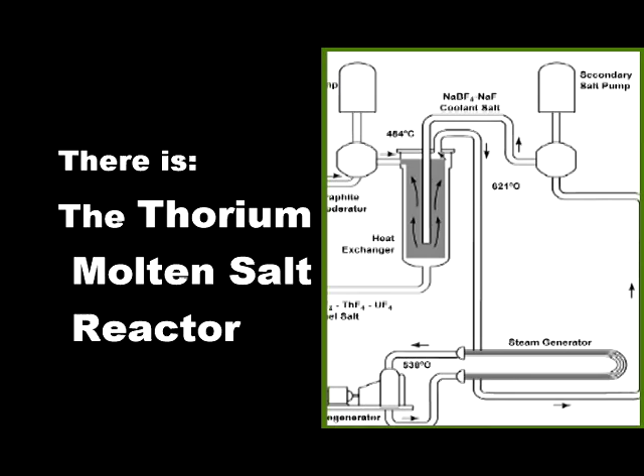You can't tell me for one second that if we put our minds to it as a species, we can't get that thing built, using existing materials. It's fine, because in the meantime we've got computers. We can model down to the atomic level what this stuff is going to do. We have huge numbers of world-class scientists at the 22 national laboratories here in the United States. We can partner up with the Czech Republic. Jan Uhlíř is doing some fabulous work in Prague right now. David LeBlanc is doing outstanding work in Canada right now. Let's do it. We can do it in 5 years, 6 years, without question. With enough money and enough will, we can do it because we definitely have the brain power. Definitely.

A molten salt reactor, particularly either a uranium or a thorium one. I prefer the thorium one, but it needs a kickstart. It needs a kickstart. And there's this thing called K-effective, whatever. You need enough neutrons around to keep the thing going, the so-called chain reaction.

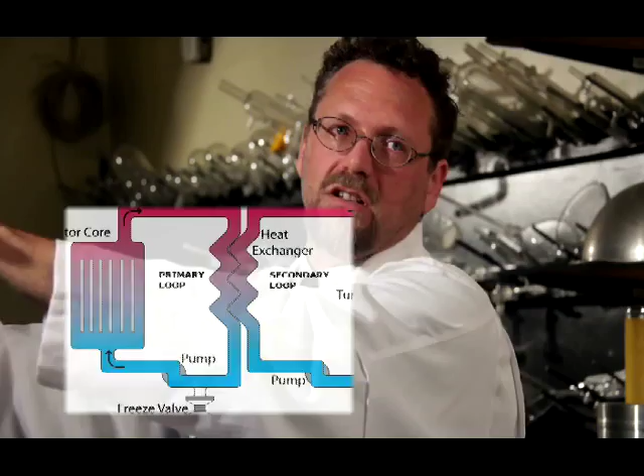And to heat up, you can do it a number of different ways. You can heat up another fluid or two fluids, and get that heat transferred into a turbine because you can make steam with that. The steam will make the turbine move, and you generate electricity in that fashion. Fabulous, everybody's happy. So that's why a molten salt reactor is so efficient.

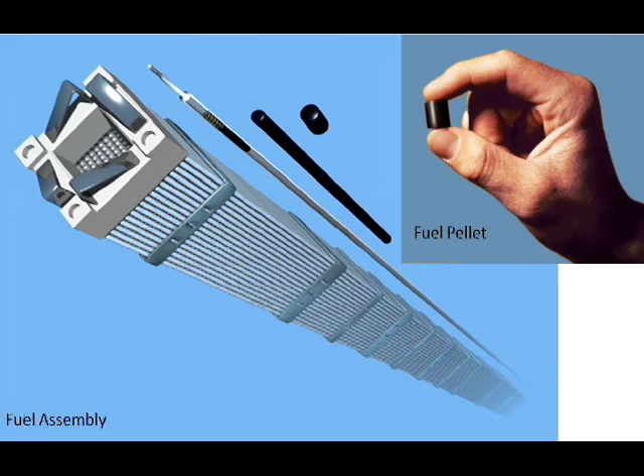Nuclear waste, as historically or classically thought of, basically comes in two forms, okay? Spent nuclear fuel, okay, it's in the form of these pellets, and these are the fuel rods, and those are little pellets. They are around 4 to 5% enriched of uranium-235. The waste stems from the fact that those are incompletely used. They are not used to completion. The way we do it right now is, again, poor design. I mean, those are not used to completion. As a result, there are two forms of nuclear waste: there are those unspent, incompletely utilized fuel rods, and those have two things: fission products, okay, and I'll go into what those are in a second, and so-called transuranics.

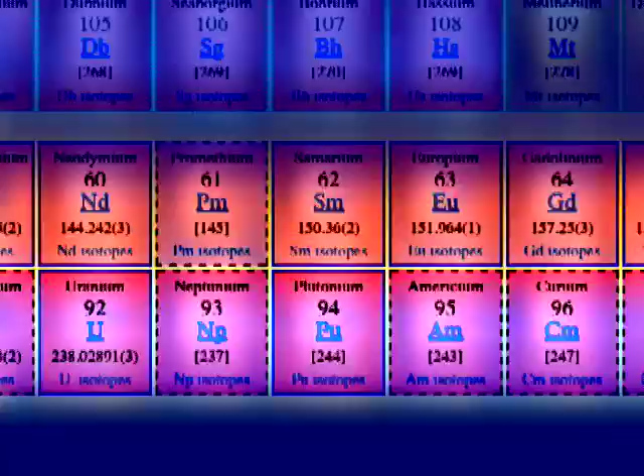When the nuclear reaction occurs, you get elements and isotopes that are bigger than uranium. You keep adding and going up and up and up. That's why uranium is not the last element in the periodic table. It's not the last element, okay? There are many elements that actually occur after uranium, and the reason is that they keep adding on as a result of these nuclear events.

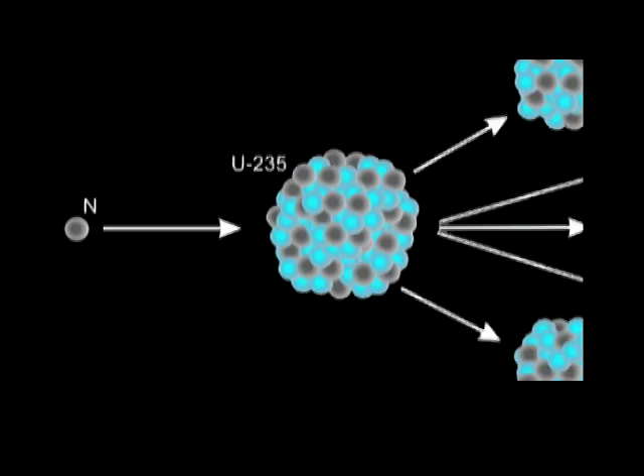That's one type of nuclear waste. That's the weird one, and that's kind of the scary one, because you can do really bad stuff with that. The other type is as a result of the fission event. When a uranium nucleus gets whacked by a neutron, it splits in very predictable ways. And those so-called daughter products are smaller, because now I've split one big nucleus into smaller ones.

Those are the fission products. Those aren't nearly as bad because you can't make a bomb with them. That's not weapons stuff. Nevertheless, they do emit subatomic particles, and they can be around for a very long time. So I'm not calling it safe, but that's kind of the safer of the two, because you can still do really bad stuff with the transuranics.

As a result of the incomplete nuclear fission, unfortunately, we can get stuff that is much heavier than uranium. Everybody knows about the most famous one, plutonium. It took on 4 more nucleons, 2 protons, 2 neutrons. So plutonium is 2 further up from uranium, and it's gone to 239, which is the very bad one. Plutonium-238 is actually a very useful one, but plutonium-239 is very bad.

And so now that's 4 up from 235, so that had to occur in some fashion. And it turns out that there are other elements beyond that. But you can still do very bad stuff with plutonium, obviously. Neptunium, it was proved that you can make a nuclear device with neptunium, so you can do bad stuff with that.

And then the other type is, as I had said before, the fission products. They give off a lot of heat in the form of subatomic particles, usually beta particles. But you can't make a nuclear weapon with those. They are long-lived. So those are the 2 types of nuclear waste.

So that's why a molten salt reactor actually works so much more efficiently. You've got fabulous surface area because it's a liquid, so everything's touching everything else. It's one big soup, and you can get very efficient expenditure of that. And that, combined with the fact that it is a liquid, so it's moving.

They basically fall into two camps, with one little provision. Camp one is a true molten salt reactor, where, like I said before, the fluid is both the fuel and the coolant. Jiang Mianheng and his project in China right now is with Westinghouse, and that is where the fuel is still solid and the molten salt is being used merely as the working fluid, merely as the heat transfer medium. Those are the two groups right now.

Per Peterson is also using the same design at Berkeley in concert with MIT and University of Wisconsin-Madison. That is where you use the molten salt as merely the working fluid or the coolant, and you still nevertheless have a solid fuel. David LeBlanc, basically the leading physicist in Canada, talks about a true molten salt reactor, using a fissile fuel as the molten salt where the fuel is its own coolant. He prefers to use LEU, low enriched uranium-235.

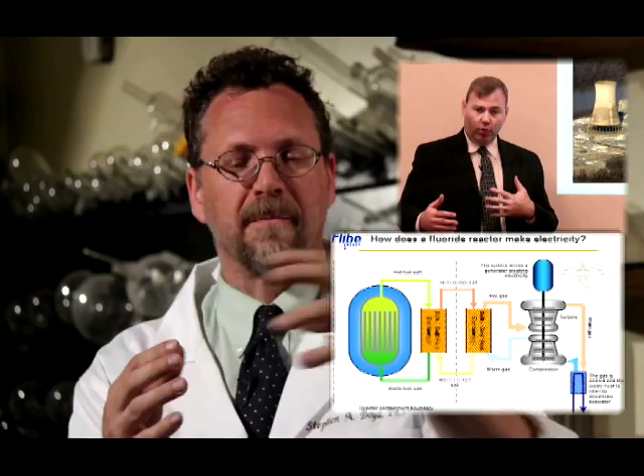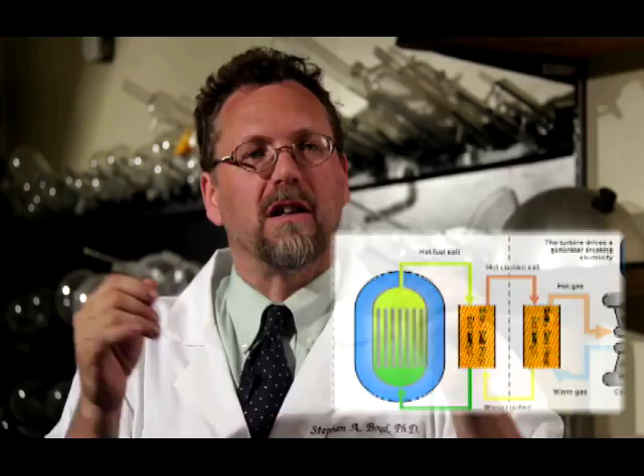Kirk Sorensen has a design which is called a two-fluid reactor. The inner one is just like a molten salt reactor, where the fuel is its own coolant. But with his design, there is a blanket. As we discussed before, it gets a little technical, but you need a kickstart for a thorium-based molten salt reactor. In his design, the outer blanket would serve as the starting point, if you will, because you're breeding the fissile kickstarter in the outer blanket.

The LFTR, as it's called, cannot currently be built. It is a great design, it's a fabulous design. I would love to see it work, but it can't be built. We don't know what the best material will be to permit the neutron flux to go out from the inner core and to permit it to breed, make the fissile in the outer blanket. We don't have that wall material, that wall that separates the two. So it's a great design, but we need to get caught up on the material science and the metallurgy.

That's probably the best way to go. Do we want to build this 1 gigawatt monolithic nuclear reactor? I don't think that's a smart move, and there are many people that would agree with me. Kirk Sorensen, fabulous proponent of molten salt reactors. David LeBlanc. The Canadian military, who are very worried about defending their northern borders, now that we basically have an all-year-round passage along Canada's northern coast. There are a lot of people that think that a small modular reactor is a great idea. I'm one of them.

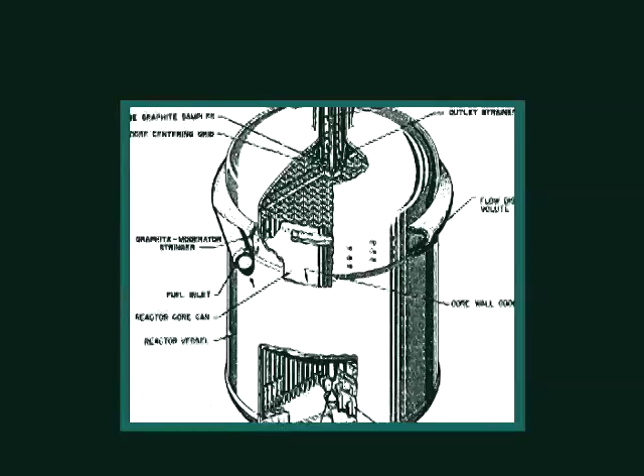Scale up. Bring in chemical engineers. They are trained to scale stuff up. The original molten salt reactor, I believe it was 10 megawatt, should easily be scalable in terms of geometry changes or combined with materials issues. 50 megawatt, 100 megawatt, 250 megawatt; probably 250 seems to be the sweet spot. But that's a great idea.

From a strategic point of view, that is a decentralized energy grid. There are lots of advantages to having decentralized stuff under heavy guard, under heavy security, because you don't want any of the nonsense. It is far easier to control something that small, and it's really small because you don't need a containment shell. There's a lot of versatility in a small size because the energy density of this thing is very, very great.

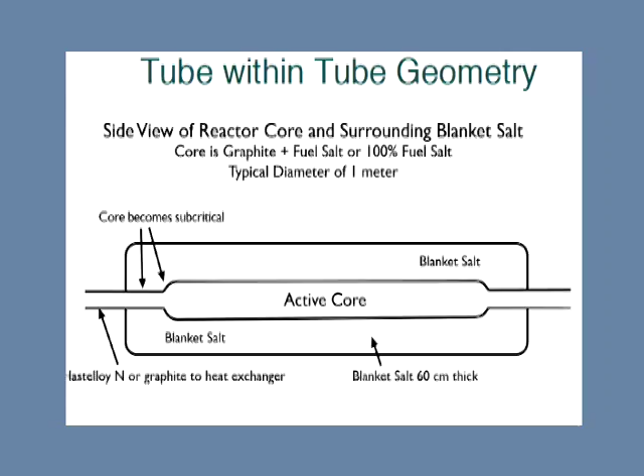So the operative word is called a calandria. It's a tube within a tube. The inner tube is where the fissile fuel is going, and the outer tube is the so-called blanket. That's a great design. He patented it, I think it's great. But even he doesn't know what that material is going to be. I have several candidates that would actually solve those problems. Candidate materials: what atoms, what crystals, what molecules could potentially make up that wall that separates the outer and the inner.

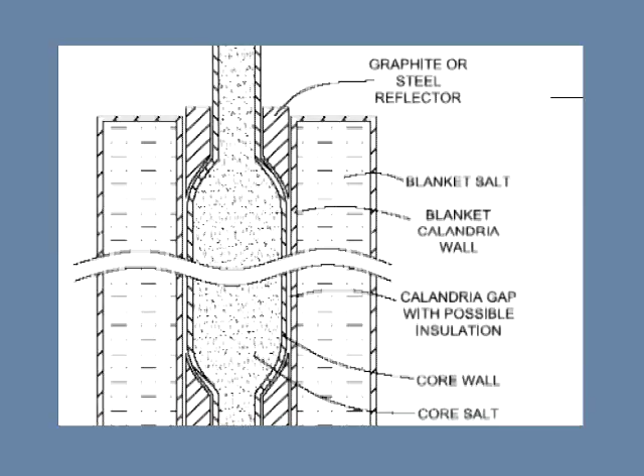It solves the three problems: the neutron problem, the embrittlement problem, and the corrosivity problem, in other words, the caustic environment. It permits the neutrons to go through, you don't have to worry about embrittlement, and it can tolerate the harsh chemical and thermal environment.

I think 5 years is a reasonable period of time. Is that aggressive as all hell? Yes. Would we use the existing materials that were actually used in the original molten salt reactor, the Hastelloy material? Yeah, so? It was run for 20,000 hours straight at over 800 Celsius. That's impressive. They did it without computers.

They did it when I was 4 years old. They did it in 1974. They had no computers. They did the whole thing. That to me is unimaginable. That to me is pioneering science.

In 1948, the really, really great American chemist Glenn Seaborg discovered the decay chain for thorium. I won't go into the technical issues, but it is a very, very interesting decay chain, starting with thorium and going all the way down in terms of it being fissile events all the way down.

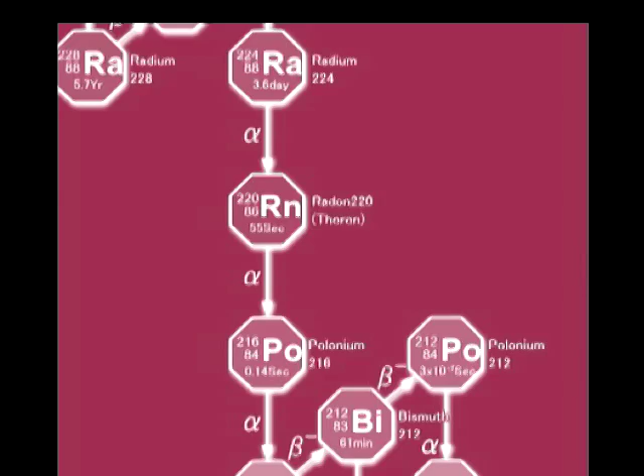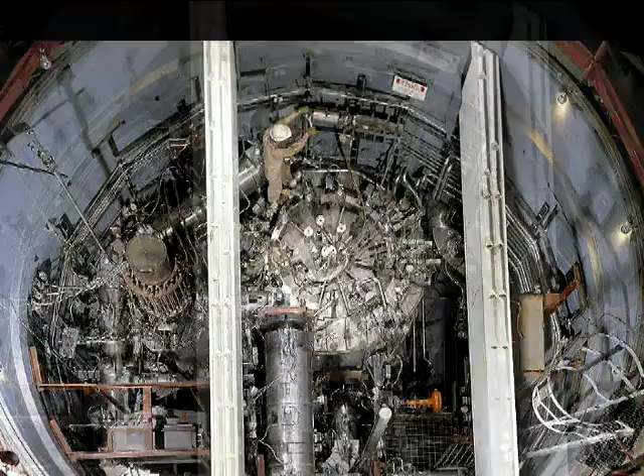That was pretty remarkable. And then, with the help of Alvin Weinberg, basically started the Molten Salt Reactor project in 1951 at Oak Ridge National Laboratories. It began in 1951 and went all the way up to somewhere around 1974 or 1976 and went down pretty hard.

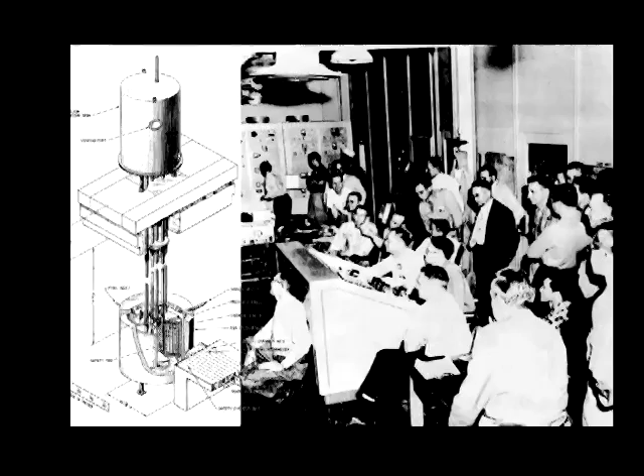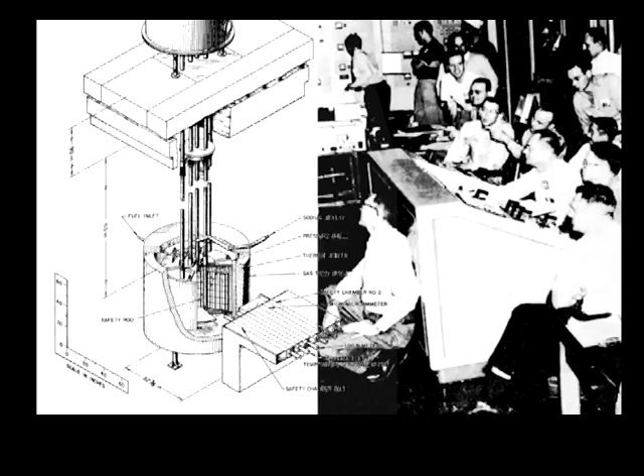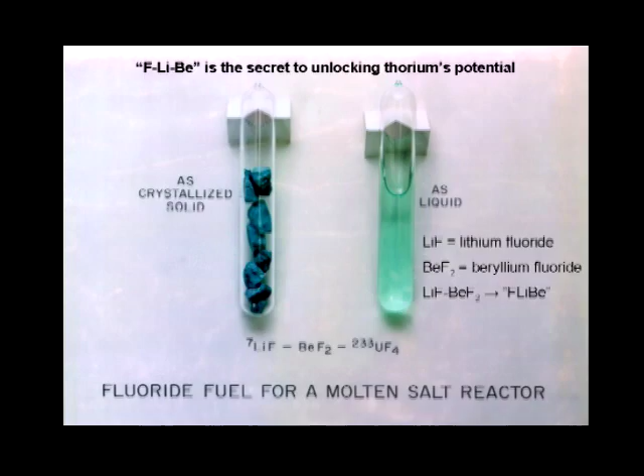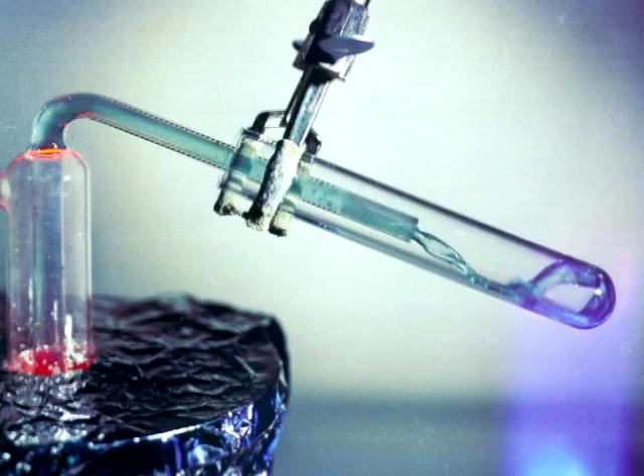Fluoride is at the heart, fluorine, the element, is at the heart of this because they are all salts. As I said, it's a molten salt. And it's a very unique type of chemistry that's going on. But anything at 600 Celsius that has to do with halide salts is pretty nasty stuff. So a lot of what they were focusing on was how to contain this.

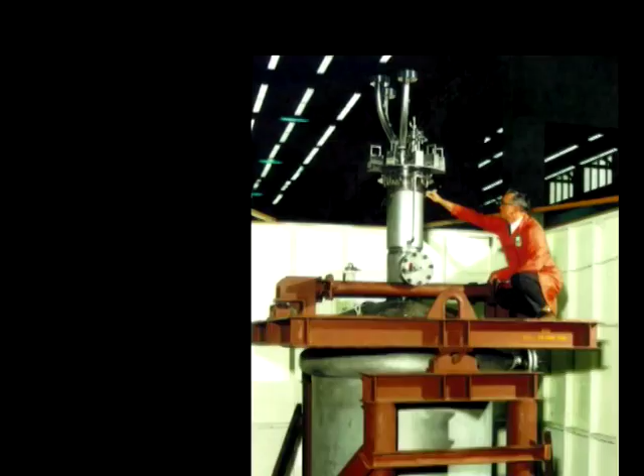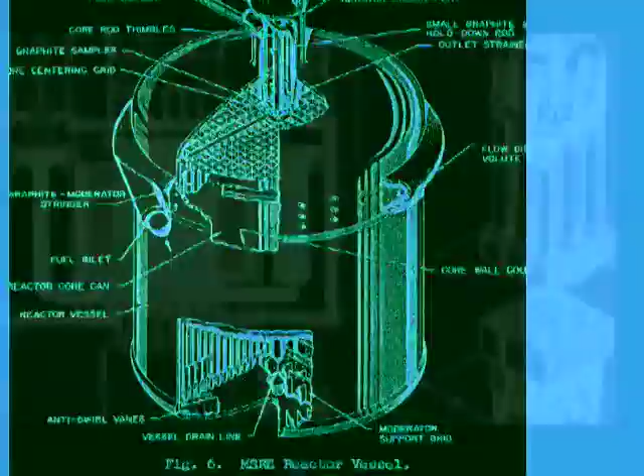And there was a lot of excellent research that was done. And there were a lot of very interesting materials that actually arose as a result of all the research that occurred beginning in 1951 and moving all the way forward. So they got up all the way into the MSRE, kept moving and moving and moving, and unfortunately got swallowed up by the political game.

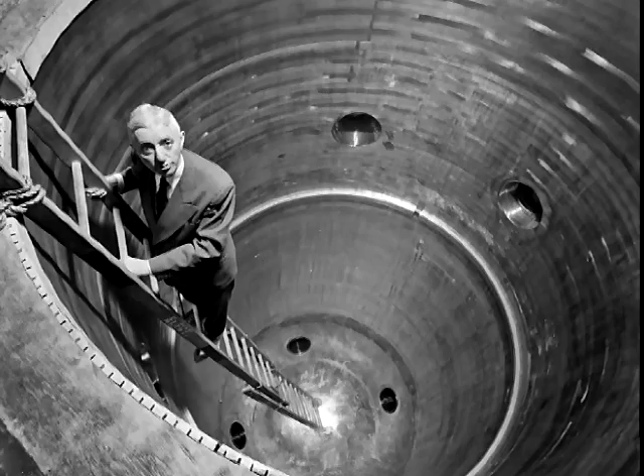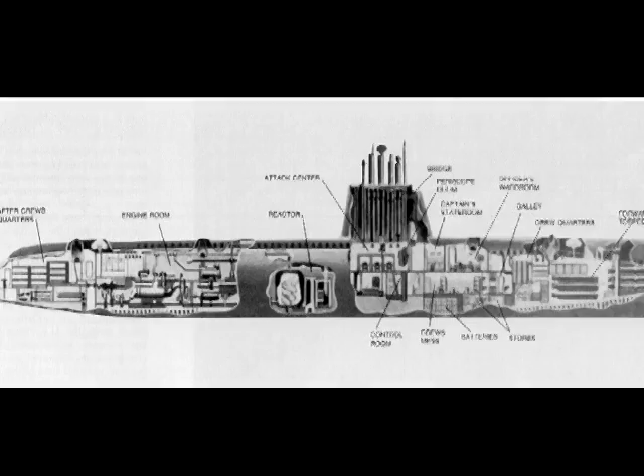Hyman Rickover was the bulldog, and he did a great number of things for the United States. He was an outstanding leader. Unfortunately, he muscled through PWRs, pressurized water reactors. A nuclear reactor is a fabulous power plant in order to get something going, like an aircraft carrier or like a submarine. I mean, it's outstanding, and that was a great move. A lot of scientists just believe, with very, very good scientific reason, not political reason, that he could have chosen a better system.

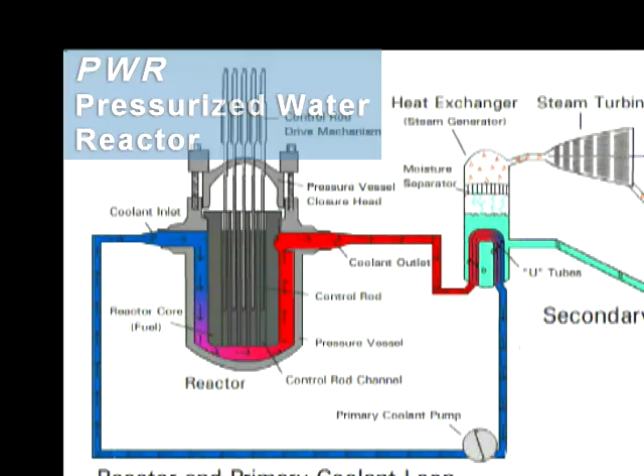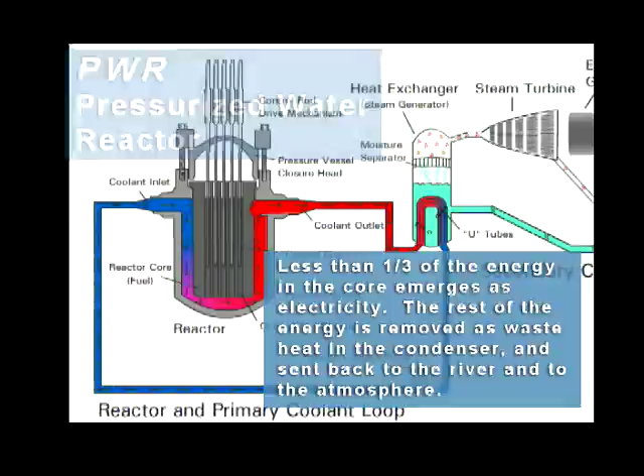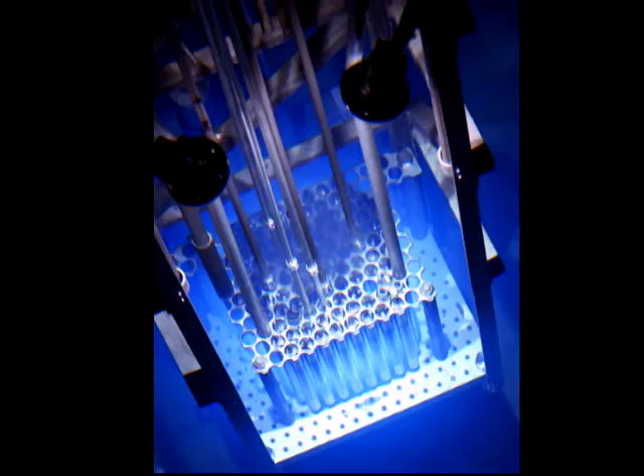We used solid fuel reactors ever since the first commercial reactor came online in 1958, okay? They are a fabulous energy source with lousy thermodynamics. And so we're stuck with what we have.

We as humans are smart enough to create for ourselves a robust, sustainable, well-diversified, clever energy landscape. That's important, okay? I personally think that nuclear is a fabulous, and a molten salt reactor nuclear platform is a fabulous way of doing it. We just need to become aware, have some sort of critical mass, become aware as a species of what's going on around us. Because as a chemist and scientists in general, we look at the abstract. We understand what's going on at an atomic level, or in some cases a subatomic level.